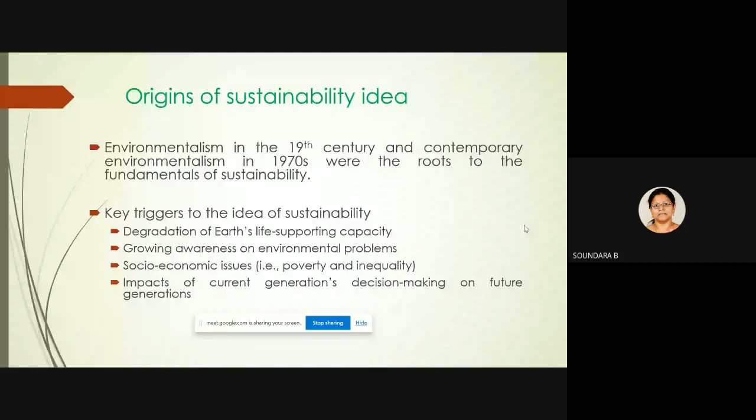The definition of sustainability given by the United Nations in the 1987 'Our Common Future' report is: development that meets the needs of the present without compromising the ability of future generations to meet their own needs. It means we have to utilize resources while also keeping resources for future generations. That is the concept of sustainability.

We also have the ASCE definition, which is a triple bottom line concept. We have to concentrate on everything lying under the umbrella of environment, economic, and society. We must take care not to degrade the quantity, quality, and availability of natural, economic, and social resources while making progress. That is the major definition given by ASCE.

There are different avenues: environment, economy, engineering, and equity, as stated by Basu et al. They have identified many conflicts in achieving sustainability among these 4 E's. This is the 4E concept. There are also 4E's, 5E's, and different avenues given by different authors, but I will not go into detail about that.

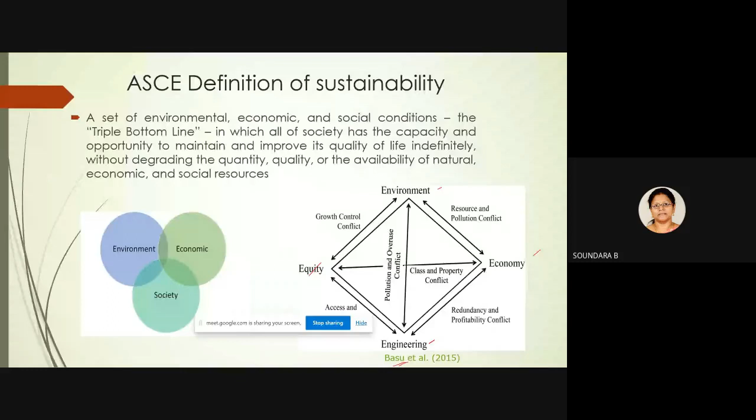As civil engineers, our responsibility includes goals like industry, innovation and infrastructure, and sustainable cities and communities—especially these two—along with clean water and sanitation. All of these come under our umbrella. We need to take these goals forward and achieve the targets set for them.

In order to make a sustainable environment, as civil and geotechnical engineers, we normally go for ground improvement techniques. As civil engineers, we have diverse and important encounters with soils. We use soil as a foundation element, laying foundations on soil so it can take the load. We depend on the soil for its bearing capacity, and we also have to monitor settlement. So first, we use soil as a bearing medium.

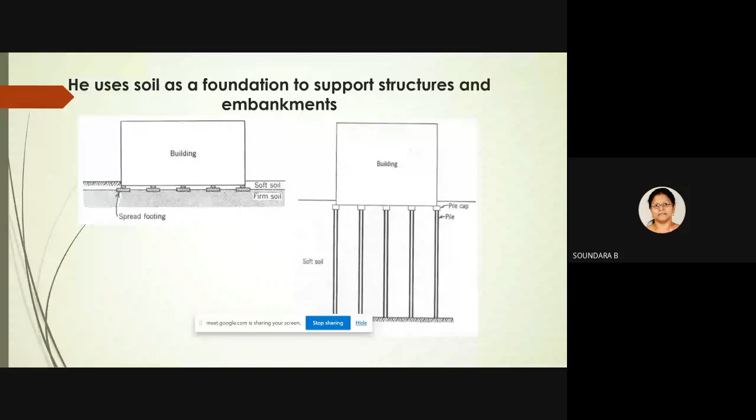We also use soil as a construction material—whether fine-grained, coarse-grained, or even gravel and boulders—and we need to rely upon its properties.

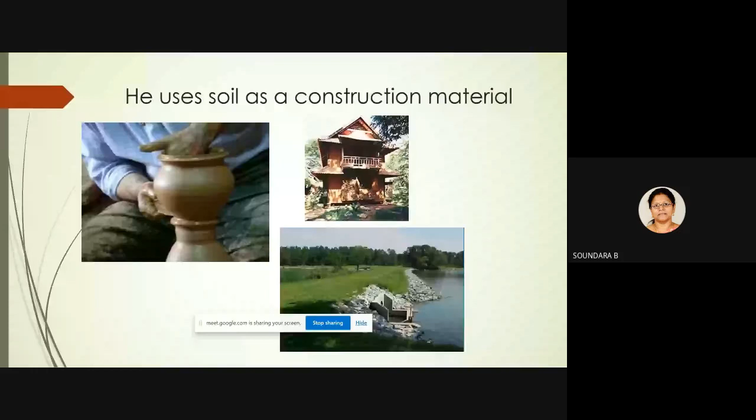We also have to take care about the lateral pressure given by soil during excavations, underground tunnelings, or openings, because soil can easily fall to its own angle of internal friction or angle of repose. So if we want to retain the soil, it will exert some pressure that we need to account for.

In day-to-day life we encounter many soils. Because of different deposition processes and weathering conditions, we may encounter soils not suitable for our purpose. From a civil engineering point of view, we have boundaries within which we need the soil to behave, but in practice the soil won't always behave the way we want. We want soil with high bearing capacity, low settlement values, and minimal fluctuation with moisture conditions—but soil in nature varies.

So I will just touch upon the problematic soils—problematic in the sense that they don't react the way we want. These are called problematic soils.

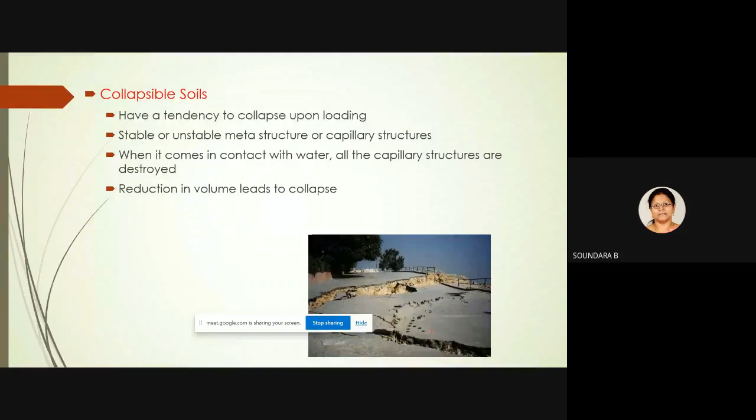Collapsible soils have a metastable, capillary structure. If water enters this structure, the capillary structure may collapse, leading to a sudden reduction in volume and sudden collapse. It is not at all recommended to found structures over this kind of soil. We can identify such soil by measuring its void ratio—the difference in void ratio between the dry state, the watering state, and its natural void ratio.

All these things we can put together and get a term called collapse potential. Depending upon its percentage, you can mention the severity of the problem. So 0 to 1 means it's okay, not problematic. But if it is more than 5, then it is a troublesome soil, and we need to do some ground improvement techniques in order to carry out construction activities over those soils.

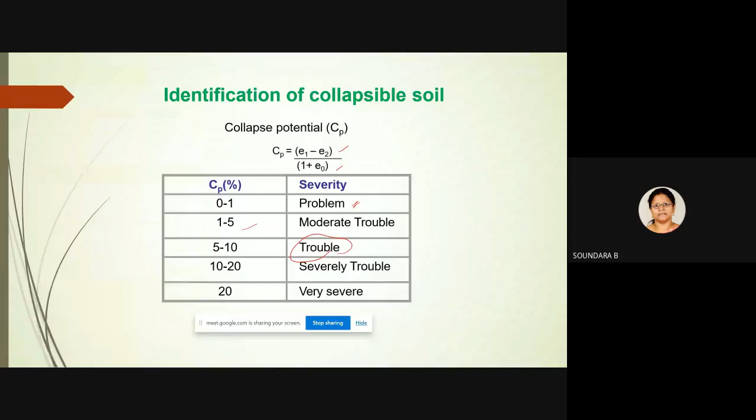This is sudden subsidence and collapse, which may occur around a few meters surrounding. So all the structures which are laid over the soil may collapse due to this sudden collapse.

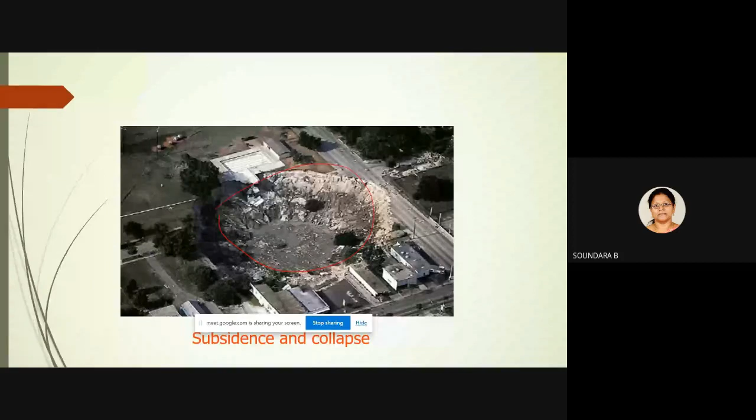The other type is liquefiable soil - it's not a type of soil, it's a condition actually. During vibration or dynamic load, especially during earthquake loads, what may happen if a sandy soil is below the ground level, and if there is a water table here, and the soil is a loose sandy deposit, then what will happen?

Immediately after a sudden vibration, the pore water pressure tends to build up - the water inside the pores we call pore water. So when a sudden vibration occurs, the pore water pressure builds up, and this sudden build-up causes the effective stress to become 0. When pore water pressure equals sigma, effective stress becomes 0. Effective stress is normally useful for getting the shear strength of the soil.

This is the shear strength of the soil by the Mohr-Coulomb equation. In effective stress condition, tau equals C dash plus sigma dash tan phi. So if sigma dash is 0, what will happen?

For cohesionless soil, C will be 0. So tau equals sigma dash tan phi, also 0, so the shear strength will become 0. Once the shear strength of the soil becomes 0, it may float - it may just lose its bearing capacity.

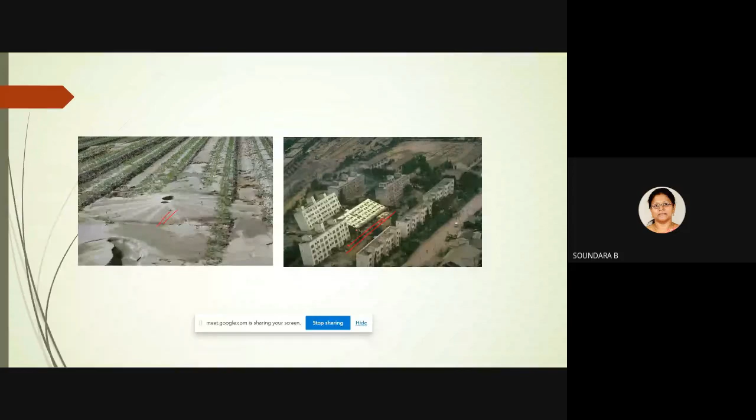Mainly sand classification is based on the relative density, and relative density has correlation with SPT N value - the standard penetration test N value. We normally do SPT tests for any soil exploration purpose, and based on those values, we can classify sand deposits.

When the SPT value is 0 to 4 or within 10, the soil behaves as a loose sand deposit. If this sand lies in earthquake prone zone areas and below the water table, there will be liquefaction. We need to treat this kind of soil, or increase its density by introducing ground improvement techniques.

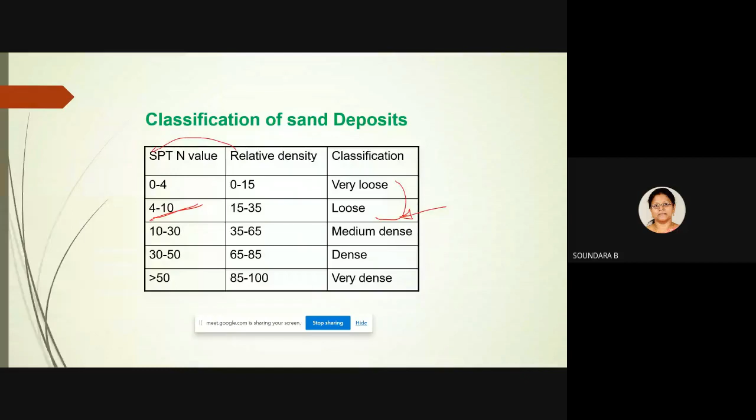Then there is contaminated soil - contaminated with biodegradable or non-biodegradable material. Usually it's very difficult to understand the behavior of this kind of soil with time. If we perform a consolidation test for soft clay, even one year later, the soft clay will give the same details about coefficient of consolidation, compression index, everything.

But if you perform a simple consolidation test for contaminated soil, it won't give the same result after a year or two, because it is already decaying due to the biodegradable material in it. So it's very difficult to predict the behavior of this kind of soil - that is one of the major problems with these soils.

Another one is expansive soils - soils which can easily swell and shrink. Swelling means increase in volume, shrinkage means decrease in volume, upon changing moisture conditions. We normally encounter different seasons, and with seasonal variations, swelling and shrinkage might occur, which reflects on the behavior of the structures.

This type of clay has a mineral called montmorillonite, which has the ability to swell upon increasing its water content. Because of that, lightly loaded structures founded over this kind of soil will be severely affected - because the uplift pressure given by the soil has to be borne by the superstructural load.

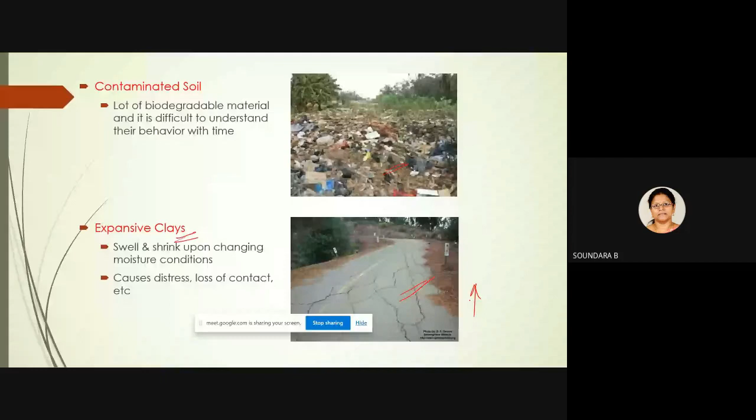But if it is a lightly loaded structure, this uplift pressure might cause uplift and differential settlements. Normally the identification pattern uses basic test parameters like liquid limit, plastic limit, and shrinkage limit, from which we get the plasticity index and shrinkage limit, very important parameters for expansive soil. With this range we have the swelling potential classified as very high swelling potential soil, when the plasticity index is greater than 35 and shrinkage limit less than 10 or so.

Again, this is a lightly loaded structure. This picture has been taken in Chennai, near the Anna Nagar area. Most of the buildings in the 1980s collapsed due to this kind of expansive soil in Anna Nagar area, especially the G+1 buildings.

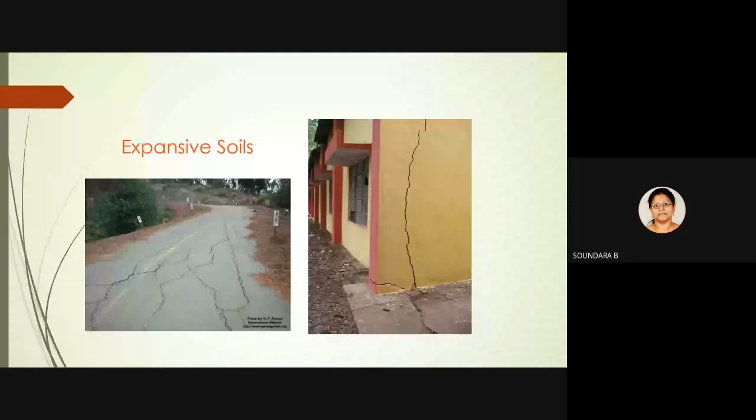Then another type of soil is normal soft clay soil deposits. We all know that soft clays possess very low bearing capacity and have a capacity for very high settlement. Both of these aspects are not wanted by geotechnical engineers, so it comes under problematic soil. We usually identify clay deposits using the undrained shear strength.

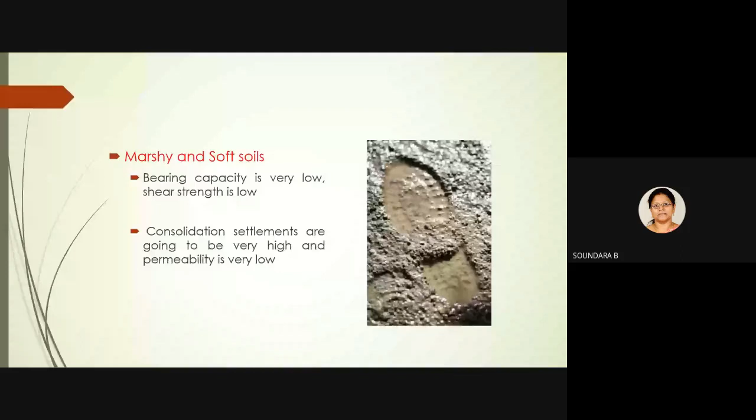For the soft clay deposits, we can perform the vane shear test, and for somewhat firm to stiff clays, we can go for UCC or other shear testing methods. Based on the undrained shear strength value, we can classify the consistency of the clays as soft to very soft, so we need to do some ground improvement for this kind of soil.

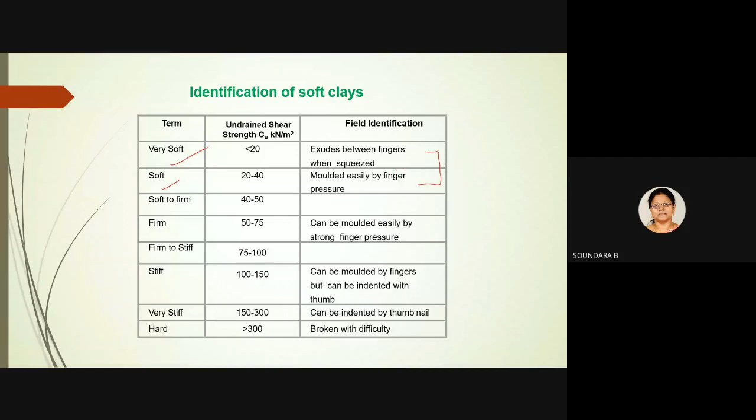By introducing some ground improvement techniques. Another type of soil is called sensitive soil. If they are in the undisturbed state, they can hold this much load, but if you just disturb its structure by remolding, it may flow as a liquid. This is because of the cardhouse structure of these sensitive soils. Normally sensitive soils appear to be very strong, but a slight disturbance makes them weaker.

It is a leda clay, usually found in Canada. This sensitivity value can normally be calculated using the vane shear test. Sensitivity is calculated as, without any disturbance, what is the undrained shear strength, and with remolding, what is the undrained shear strength. If you take the ratio of it, that is called sensitivity.

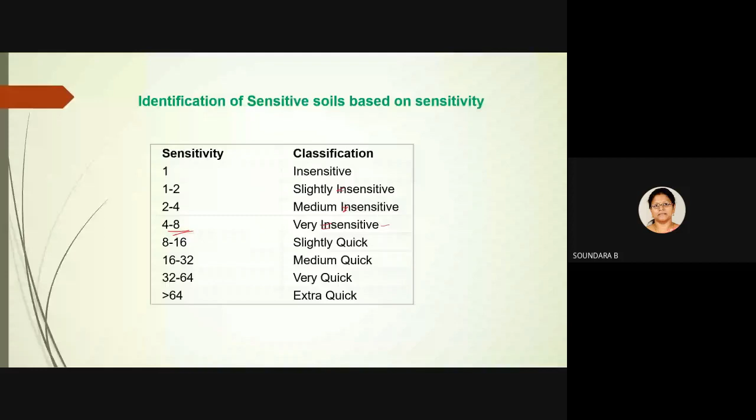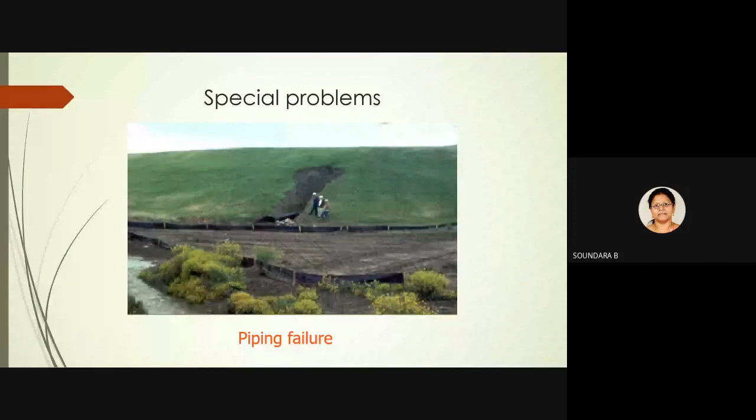There are some special problems like piping failure because of sudden rainfall conditions, which may cause piping failure. This is a recent landslide in Munnar.

So there are so many reasons why we need to go for ground improvement techniques before construction activities. The ground improvement techniques also need to be optimized. How can we optimize the entire solution regarding the ground? The first thing is we should have very good data about the soil, what kind of soil deposit is there.

That can be obtained only by doing extensive soil investigation. We may require around 2% of the entire project cost for extensive soil investigation, but in most situations we neglect this kind of soil investigation. That should be avoided. We must have very good soil data, then only we can think about the improvement methods to be adapted for the soil.

And physics, what kind of force is acting. If it is a cohesive soil, cohesive force will be there; cohesionless soil, friction will be there. So what is the physics which controls the entire mechanism in the soil? That we need to assess. Then materials, that part I will go into detail in this presentation.

The materials used for construction or any treatment methods should be cost effective, and the carbon footprint of the material should be low, ideally a waste material. If you reuse it, that gives further optimization to the problem. We also need to consider time, how long it takes to process the whole thing, and convenience, whether the solution is flexible enough to allow changes in between. These are the approaches we need to consider before getting a suitable technique, like ground improvement techniques, for optimization of the geotechnical project.

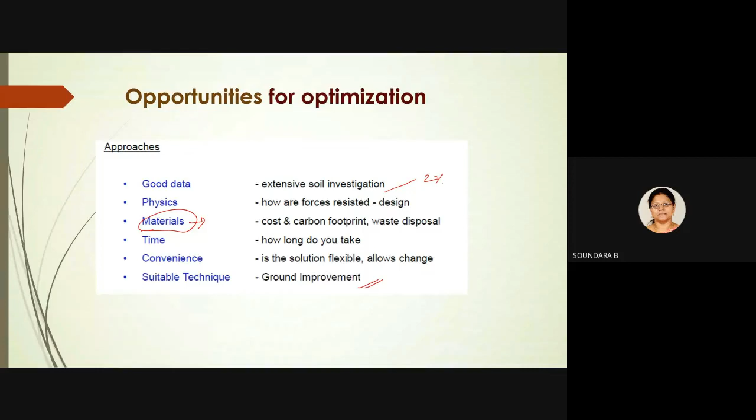If you go for any ground improvement techniques, we can classify them into ground improvement, ground treatment, and ground reinforcement. There is a slight variation in these terminologies. Ground improvement means the ground stays the same, we don't include any material into it, but we improve the ground by means of densification techniques, or we use hydraulic techniques to reduce the water table or reduce the pore water pressure in it.

So if you improve the condition of the ground by mechanical means, that is normally called ground improvement. Ground treatment means we need to treat the ground by giving some dosages. Similarly to how a doctor gives medicines to treat us, for soil also we need to give additional material to treat its behavior, whatever is needed. By introducing cement or admixtures like lime or fly ash, we treat the soil in the way we want.

Reinforcement also performs like a treatment, but it will not react with the soil. Instead, it induces additional friction to the soil, so that the reinforcement provides additional benefit in shear strength. These are different mechanisms, but the aim of the entire thing is to make the soil behave the way we want.

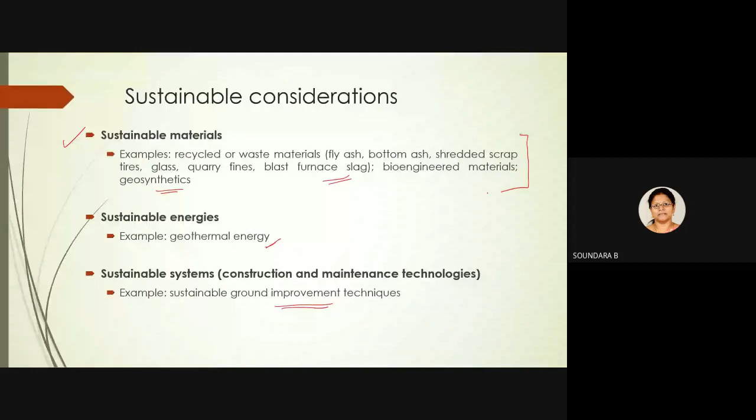And the sustainable system - normally whatever systems we have as ground improvement techniques all come under the sustainable system. So most of my lecture today will focus on sustainable materials. I'll give a glance at some of the research works and case studies available in this area.

The first thing is geosynthetics. Geosynthetics nowadays have been used in each and every project somehow. In most projects we are using this kind of geosynthetic material. Most geosynthetics are made up of HDPE, high density polyethylene material. There are different varieties: geotextiles, geogrids, geocells, geomembranes, and this is actually XiTRACK. It depends on the purpose where we are using it, and based on the purpose, different varieties of geosynthetic materials are coming up nowadays.

We also depend upon geosynthetics very much nowadays. These are the major functions of geosynthetics: one is the separation function, especially in road pavements, to separate the soft subgrade and subbase material - that's the separation function. Filtration, especially for water filtration, and reinforcement - this is a major function we expect. Normally we use geogrid and geotextile as reinforcement material, and also for slope protection. For all these things we use geosynthetic materials.

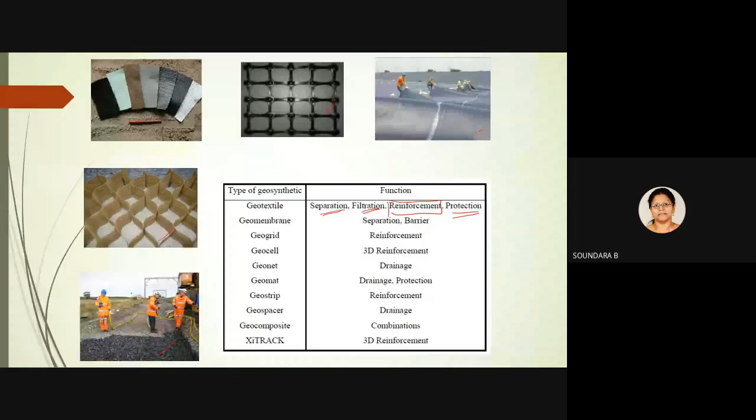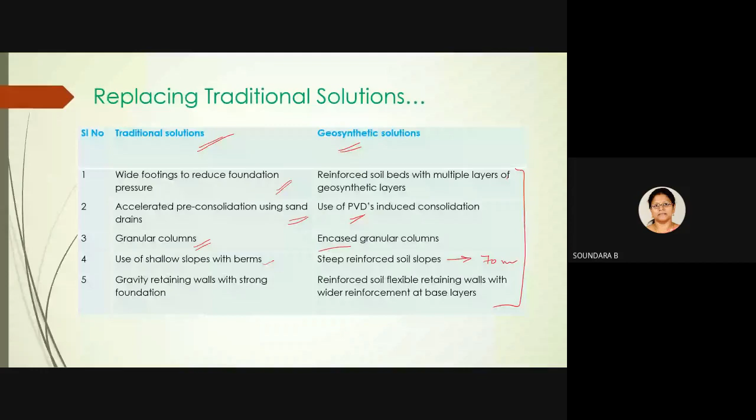If you talk about fill materials, for earthen fill materials needed for any embankment purpose or fill material embankment for any railway, that fill material can be of industrial waste material. These are the materials which we have focused on for geocell fill. Geocell, as I have shown you, is a three-dimensional structure, so within this we need to fill some portion of soil or any fill material in order to increase its performance. That can be given by means of this kind of industrial waste.

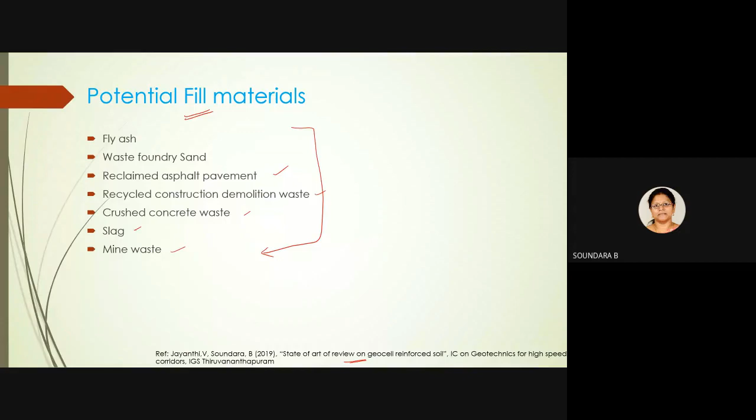There is a review paper done by us which states the possible fill materials that can be taken from industrial waste, like fly ash, waste foundry sand, RAP material, reclaimed asphalt pavement, recycled construction and demolition waste, crushed concrete waste, slag from steel industries, and mine waste. All this waste can be used as an effective fill material, not only for the geocell but for any case where we need to fill the soil, or for any embankment purpose.

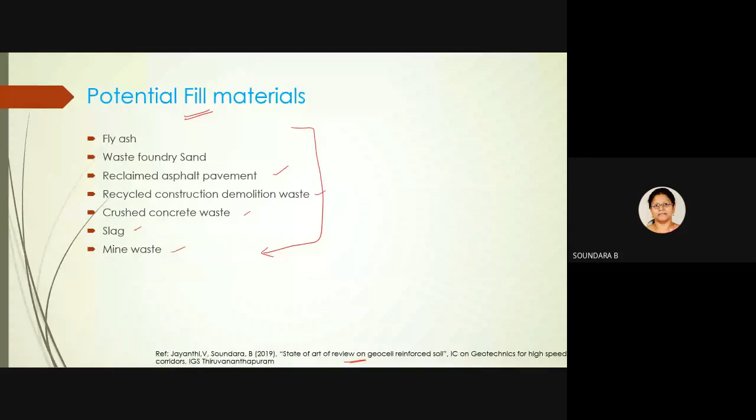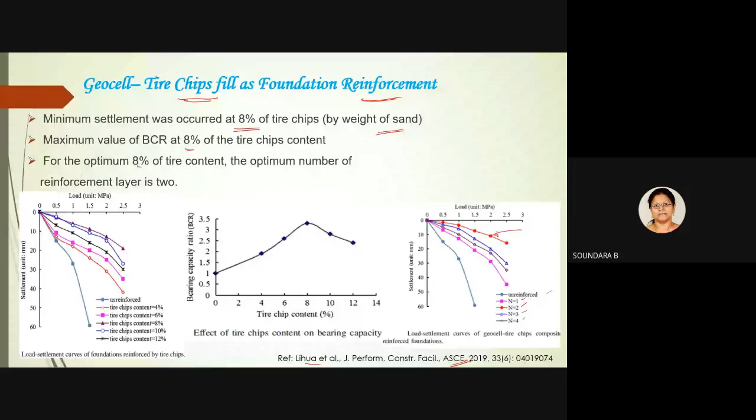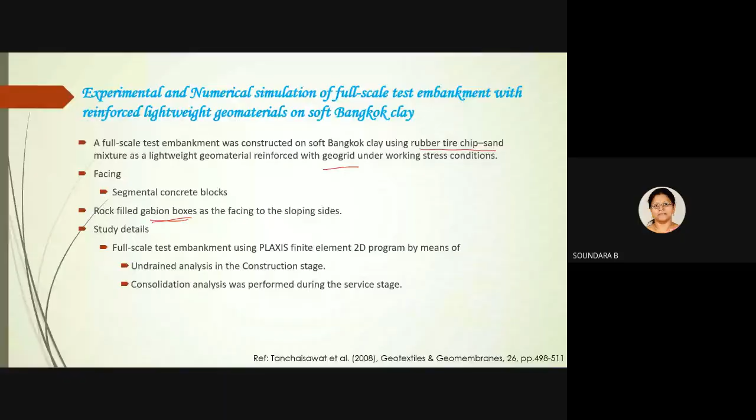This is the full-scale embankment we have made. It has been well instrumented with earth pressure cells, inclinometers, for getting different settlement profiles, subsurface settlement plates, piezometers to study pore water pressure distribution, and strain gauges and extensometers.

All these are well instrumented, and they observed the settlement pattern and pore water pressure development by constructing this kind of full scale embankment. They also analyzed it in Plaxis, for the undrained case.

These are the observations they have made. The computed lateral wall movement over-predicted the measurements. This may be due to negligence of drainage conditions in the Plaxis 2D software. So they have not modeled properly the drainage conditions, and that may be the reason for the over prediction of lateral wall movements.

And the simulated geogrid movements under-predicted the observed field data. There are some deviations between the predicted and observed field results and the Plaxis report.

Anyway, they have made some comparison and given their solutions on how we can improve the modeling part. In our cases, as private engineering colleges or lower level research institutions, we cannot perform a full scale embankment modeling. So if you have a well defined Plaxis, or any finite element model, not only Plaxis, which can perform better or correlate well with the case of a full scale embankment or whatever large scale model it reflects, that will give better research findings for us. So we need to have much more focus on this kind of research.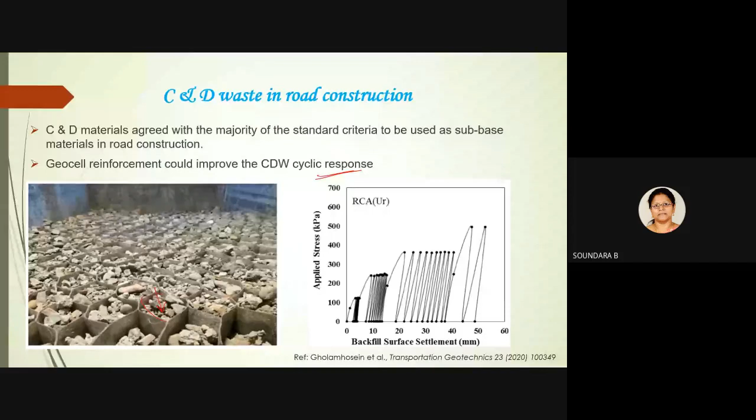And Castorina Silva Vieira, they have valorized the fine-grained C&D waste. Normally we concentrate on coarse-grained C&D waste, but they have adapted also the fine-grained C&D waste in reinforced soil structures, and they have applied that solution for RSS.

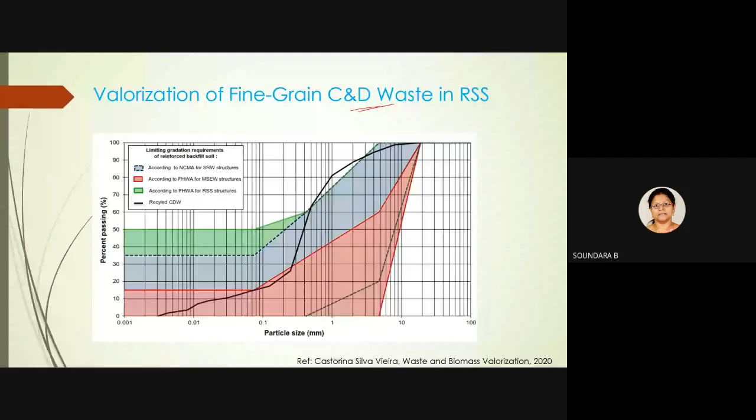Again, they have made a real model for this kind of embankment with geogrid material as reinforcement and C&D waste as fill material. They monitored it for about one year, and examined the geosynthetic specimens, and found that there is no damage to the geosynthetics, and it is performing well even after a year.

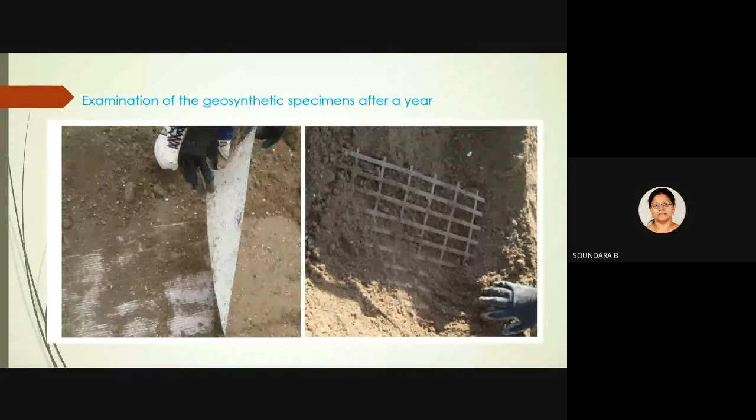The major findings: they performed laboratory leaching tests, especially for C&D recycled material. Leaching could be a problem, but based on the laboratory leaching test, they found that C&D materials can be classified as an inert material. So we can use this material as a fill material for geocell or any fillings. C&D recycled material exhibits suitable shear strength and can be used in construction of geosynthetic reinforced structures.

They have adapted 2 geogrids and observed the performance after 12 months, and did not find any damage to the geogrid or any degradation.

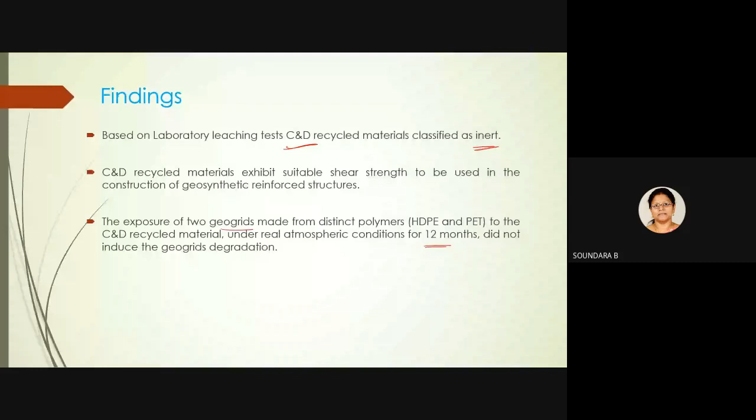This study was done in one of the Indian laboratories, I think at an IIT. It uses geocell reinforced coal mine overburden waste, which they used as a subballast in railway tracks on weak subgrade. They found that we can use this kind of waste material to improve the performance of the subballast layer.

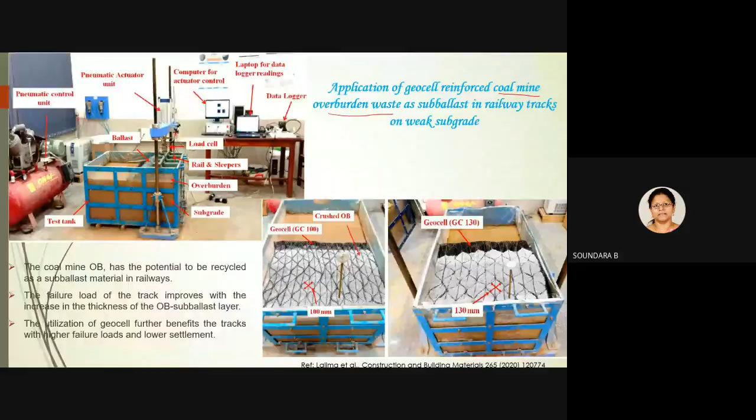This is another field test, I think performed in some foreign countries, with reference taken from ASCE. They monitored the geocell reinforced RAP base, where RAP is reclaimed asphalt pavement. After its lifetime, asphalt pavement is normally removed and a fresh layer applied, but we can utilize this already reclaimed asphalt pavement as a base material for flexible pavements.

They made this study even in expansive soils, and found that 100% RAP replacement is not feasible, but we can use maybe 50% RAP for the base layer. They noted that using 100% RAP in the base layer is not significant on its own, but if we use geocell reinforcement, then we can utilize 100% RAP. That is the finding given by them.

They also monitored with different instruments, earth pressure cells, settlement gauges, and all these things, monitoring the subgrade and the geotextile layer, and found that it performs very well under geocell reinforcement with 100% RAP. They monitored this for about one year.

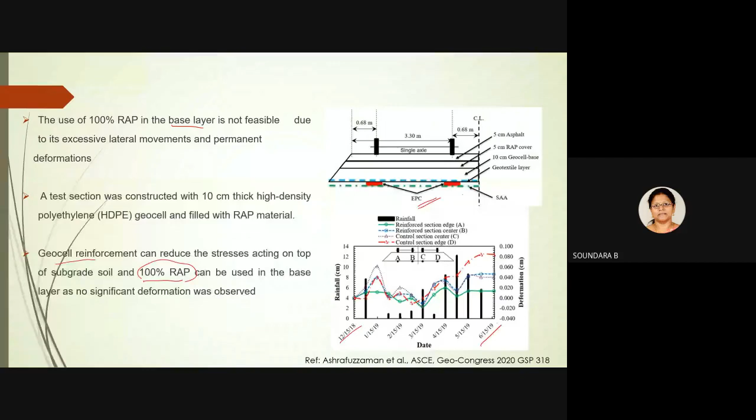This is one of the studies, I think from IIT. They have used fly ash as a bed material and utilized geocell as reinforcement. I am talking about geocell because I have made a review on it, looking at what different waste materials have been used for geocell fill. One of my PhD scholars is doing work on geocell fill material, especially industrial waste material, so it is a kind of research we can do. Before that, we need to analyze all the studies available in that area, so I've made these reviews and I'm presenting these papers so you can get an idea of the research happening in premier institutes like IITs and other foreign universities.

Here they have adapted a fly ash bed and geocell mattress with a basal geogrid and jute geotextile separator. They made a footing by modeling a loading plate as a footing and monitored the settlement; the load-settlement behavior is given here. They found there was no surface deformation during footing settlement in the reinforced fly ash beds, which was one of the better observations they got.

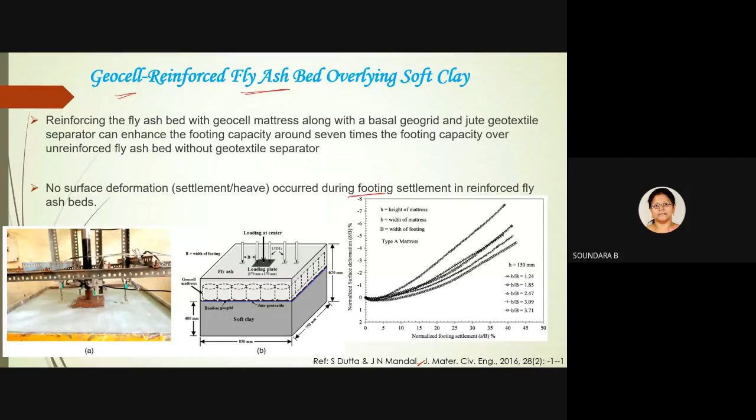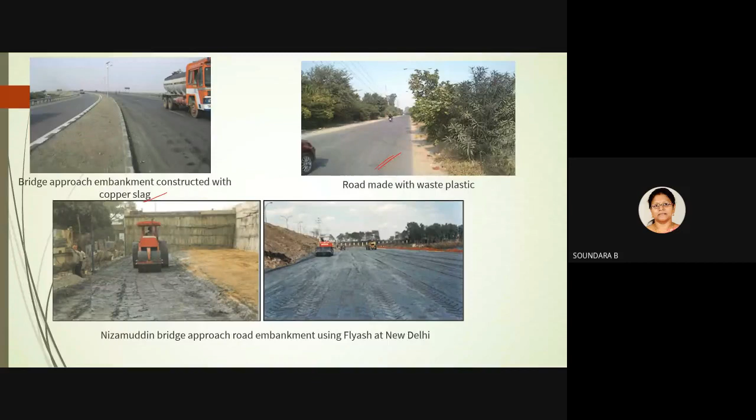I want to mention one more material called CLSM - controlled low strength material, made up of different industrial waste. This is a project, I think in the USA, where they adapted design and installation of a long pipeline, about 225 kilometers, which carries water from different regions and distributes it to others. I don't know all the names, but it's a very long pipeline.

For that pipeline, we need to make the haunch or bedding material, which they thought to backfill using some CLSM material. They need to excavate a portion of soil to install this pipe, and then backfill it. So they thought, why not use this excavated material as one of the ingredients for CLSM and make it a bedding material. They checked this and used the native soil as a CLSM material.

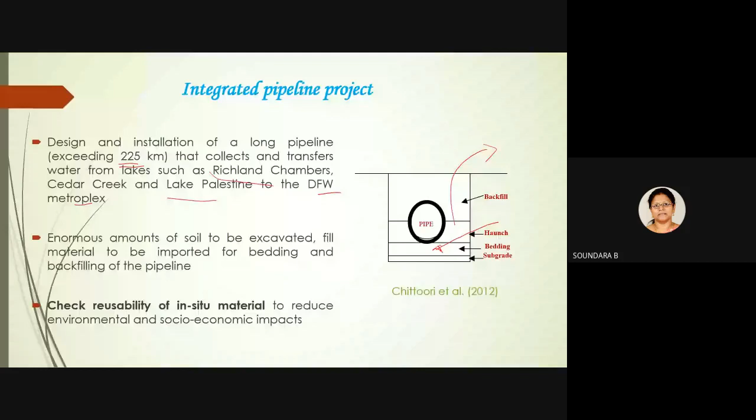CLSM normally has these properties: it should be flowable, self-leveling, and solidifies. It may not perform as well as concrete, but for pipeline bedding we just need a stiff material - that's enough, so they can utilize CLSM.

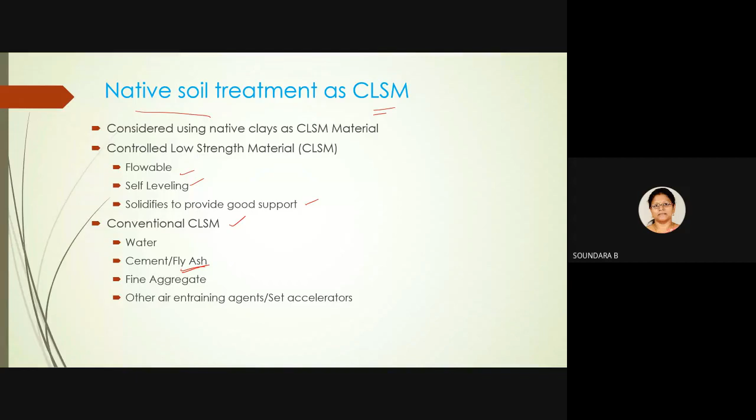Conventional CLSM has fine aggregate, a cementing agent, and maybe fly ash or other industrial waste material. But here, they utilized 10% cement and most of the excavated material for the fine aggregate. They combined all these things to make the CLSM, trying combinations of soil type which reduced the required water content by 20% and setting time by 2 hours. These were the limits given, and within that they made trials in the laboratory and found a better proportion to use for CLSM.

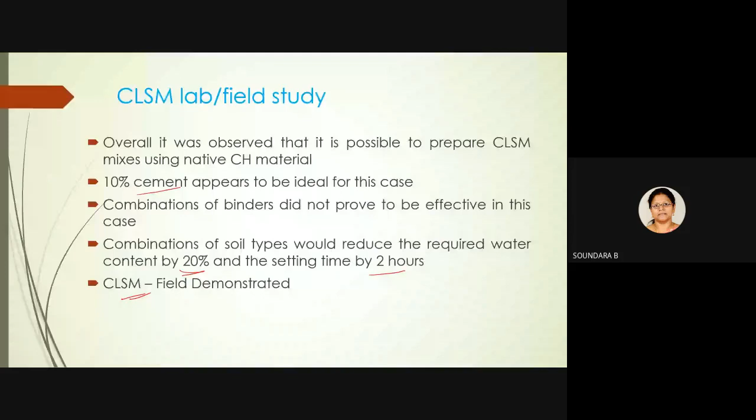This is a field-demonstrated case, and they obtained sustainability considerations in this project. What are the major impacts of using this CLSM material with in-situ material? There's a social impact from reusing excavated material, and less damage to city pavement due to less transportation - there's no transportation from any industry since they utilize the excavated material for their purpose.

There's also economic impact: cost saving from reusing native material, limited landfilling cost, and limited transportation cost. And environmental impact: since we're reducing transportation, there's low carbon emission and less landfilling because the excavated soil can be reused. So all the triple bottom line I mentioned earlier - social, economic, and environmental - all lie in this project.

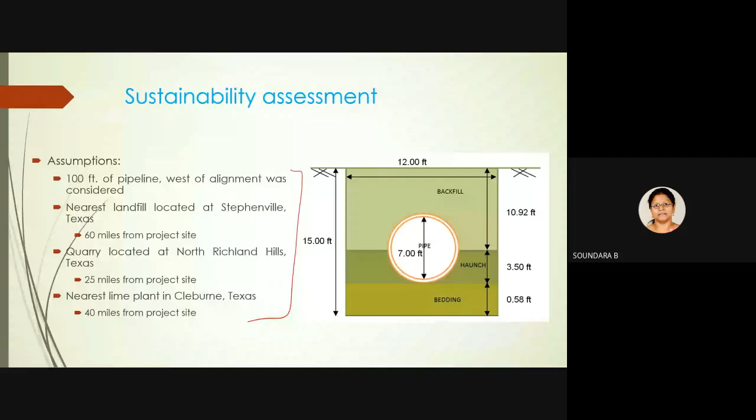So they have made 3 different calculations: one using native material without any treatment as bedding and embedment, using imported material as bedding and embedment, and using native material with treatment with some other additive materials. So they found there is a reduction in CO2 emission in both of these cases.

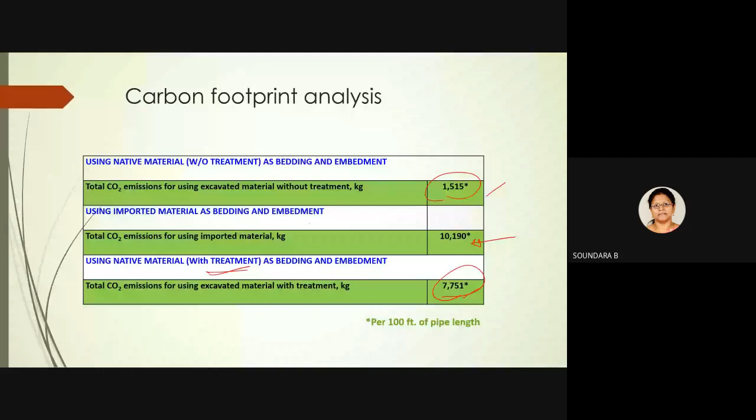Rather than importing the material, we can utilize the available material for our purpose. And also the cost analysis, again for the 3 cases, they found both of them will reduce the cost much rather than importing any material from outside.

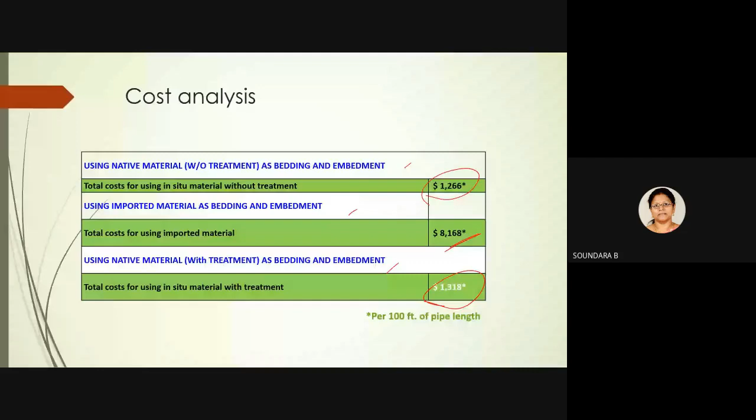So this is one of the field case studies which reflect the sustainability of the project. The lessons majorly learned from this case study: there is considerable potential for reuse of the local native material. Even though the local native material is classified as CH, that is clay of high compressibility, they have utilized this native material as CLSM, and there is a major reduction in carbon emission.

There are several millions of dollars of cost savings. So for each and every project, we should look upon any point which can give this much benefit to the project. That is nothing but the sustainable aspect of the project.

Next one is my own project: the expanded polystyrene, which is normally called thermocol. It is lightweight, durable, and moisture resistant can be given. These are some of the properties of expanded polystyrene.

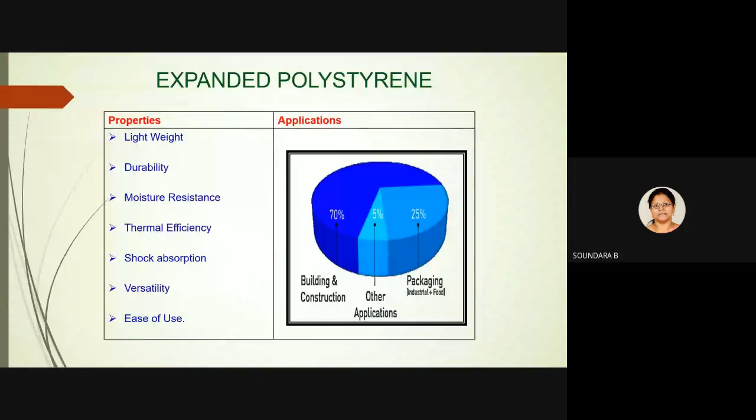So why am I talking about EPS here? I have used the EPS, and earlier studies reported that compressible inclusions can be given to geotechnical applications in order to reduce the pressure given by the soil. This was adapted in 1997 itself by Horvath, who used the compressible inclusion in a retaining wall.

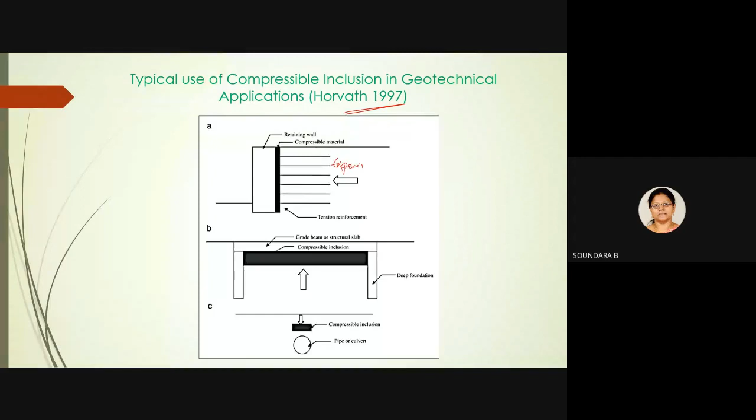This is an expansive soil. So in order to take up this expansiveness, they have included this compressible material so that it can perform as a compression material, so that it can take up the heave and also the pressure which is exerted by this expansive soil.

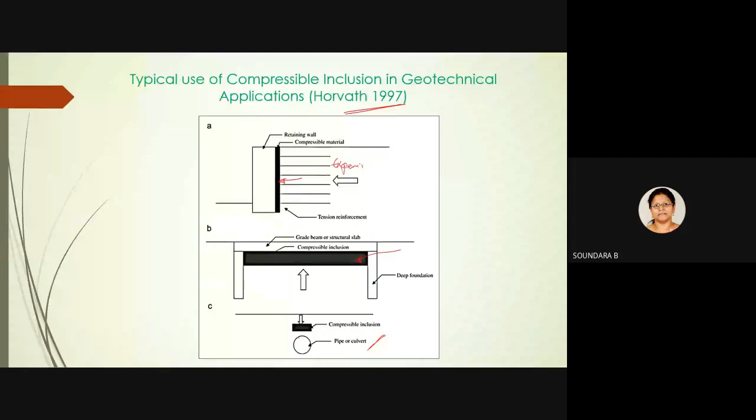So that is one of the purposes here. And here also, this compressible inclusion can act as a cushioning material, and even above the pipe material, like a haunch material, we can utilize the compressible inclusions. So this I have applied for expansive soil.

This is the project which I got from SERB under early career research. What we have proposed - this is a pure laboratory study.

So for the expansive soil, one of the treatment methods is lime columns. We can treat the soil by introducing lime as a column for some deep strata treatment. But if you use lime as a material, the first thing is the cost, and the second one is environmental degradation. In some cases, the lime may increase the pH, so it may lead to poor environmental problems.

So in order to address those problems, the EPS waste material can be used. The waste EPS geofoam can be utilized in place of lime or cement or fly ash, whatever we use for a column for improvising the expansive soil, replacing that with waste material and giving some inclusion to the expansive soil to take up the swelling. That is the main aim of this project.

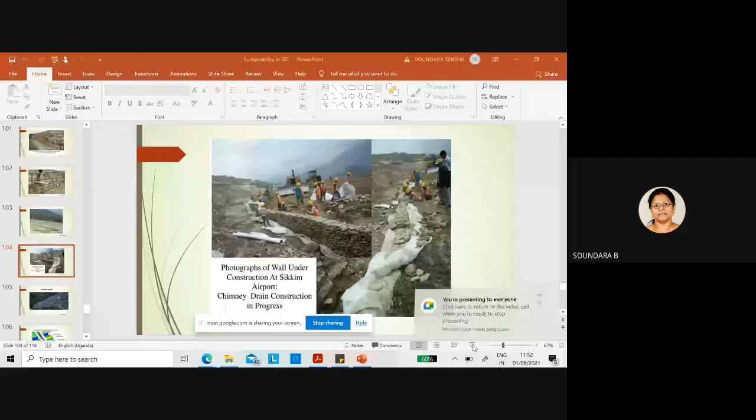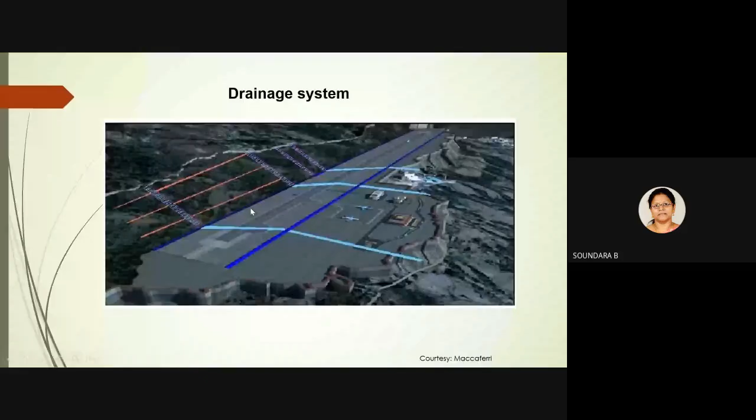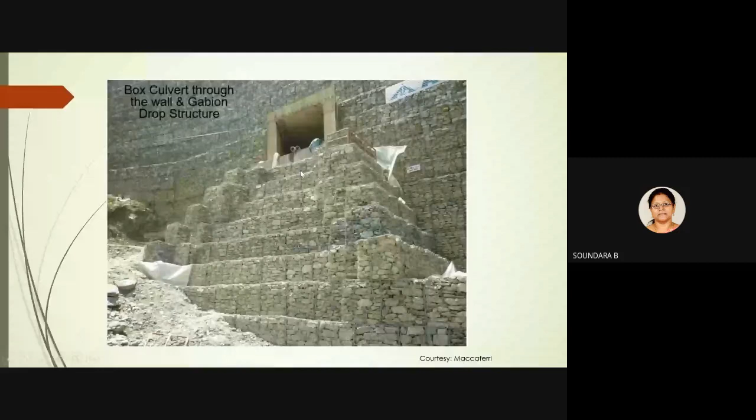I was just talking about the construction of the airport at Sikkim. They utilized their research team to get an idea about the sustainable considerations for making this airport. They designed up to 70 to 80 meter height MSE wall and drainage aspects also. I have shown here the chimney drain construction in progress for drainage purposes, and these are the pipes which can collect the drained water from here to here. We need to follow a complete drainage system for effective functioning of this RS wall, so there is a different drainage capturing system. This is one of the beautiful ideas they got - if the water flows here, it is...

So they have adapted a combined reinforcement system like Terramesh and Paraweb - it's a kind of combined solution so that they can adapt it and get a cost benefit out of it. They have also utilized the excavated material for filling, which is also one of the sustainable solutions.

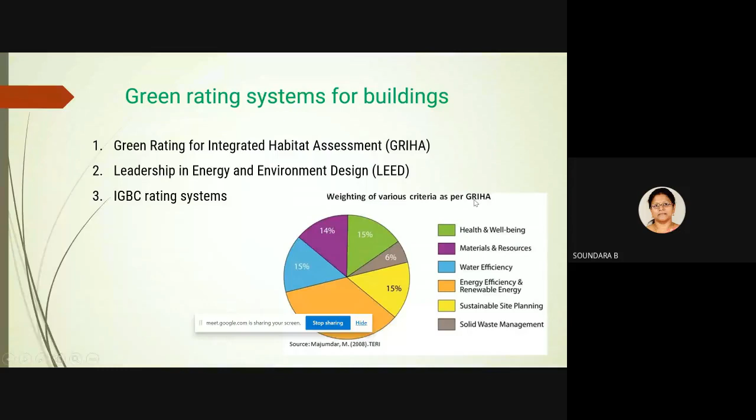So I was talking about the summary, and for everything we need some reward, right? So there are some green rating systems, even for buildings and structures. These are the different green rating systems we follow in India - Griha, LEED, and IGBC are the three different rating systems followed in India. LEED is US based, and there are different categories like sustainability of the site, water efficiency, energy and atmosphere, and materials - so we can include recycled and reusable materials for our use, indoor air quality, environmental quality, and innovation and design process.

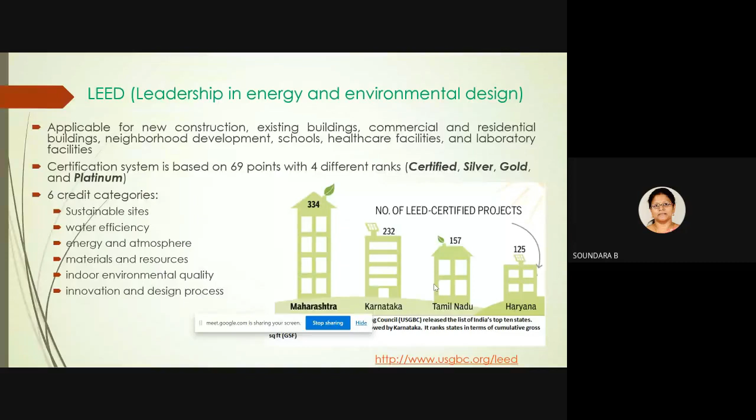So far, this is data from 2019. So far in Maharashtra, 334 LEED certified projects were there, and Tamil Nadu is in third place. Anyway, we need to boost this up in order to develop sustainability in our day-to-day buildings or other activities.

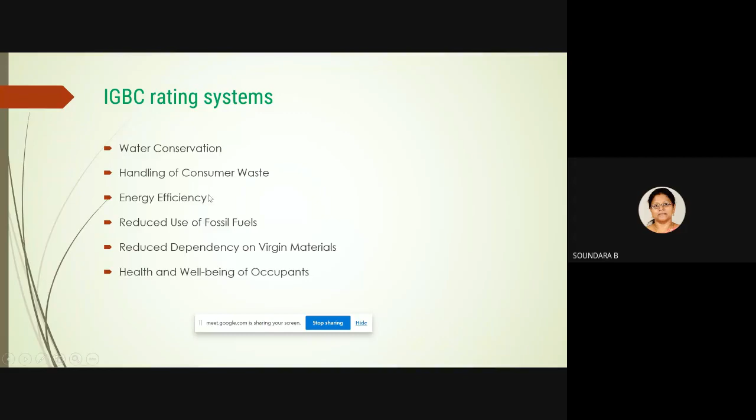So this is the final closing comment. In every aspect of our day-to-day life, we need to introduce the sustainability aspect. So as a geotechnical engineer or civil engineer, we are challenged to do the right project, incorporating some sustainability aspect. So sustainability assessment tools can be used to assess or optimize sustainability in geotechnical engineering. These examples and case studies demonstrate how sustainability can be incorporated in geotechnical designs. So I think I can stop here.

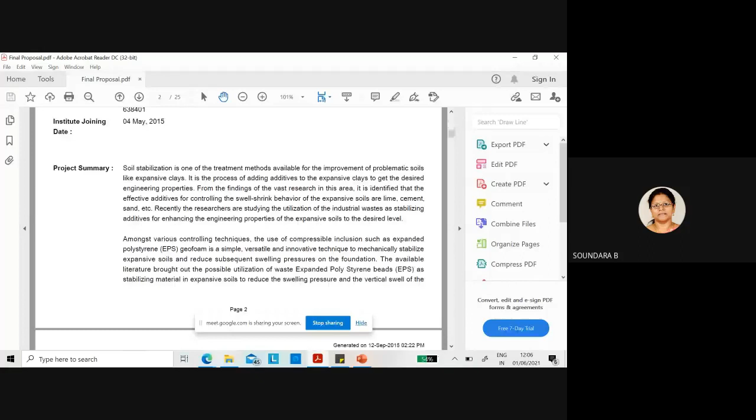And these are the details of mine, especially the project summary. They will look upon this project summary, so we have to specifically tell why we need to do this project, so that research gap should be identified and should be mentioned.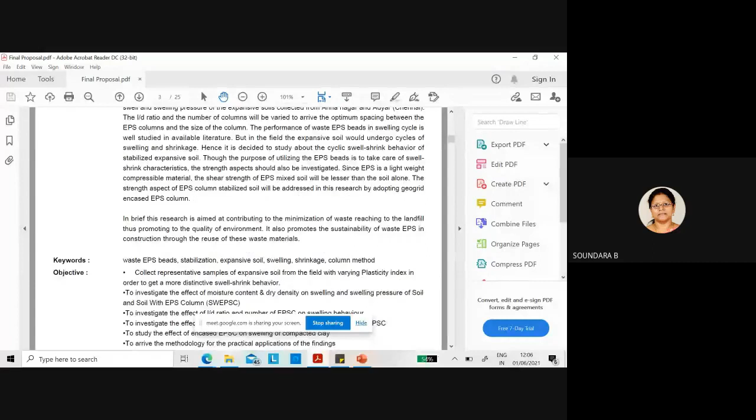And there are keywords and objectives. Objectives, of course, should be in bullet form, around 5 to 6 objectives. So why we need this, what the aim could be split up into objectives. And expected output - they have asked for expected output and outcome.

So both of the things are mostly the same, but output means what is the output from the research. Outcome means with that output, what we can do for the society or how we can implement that one. So that is the outcome.

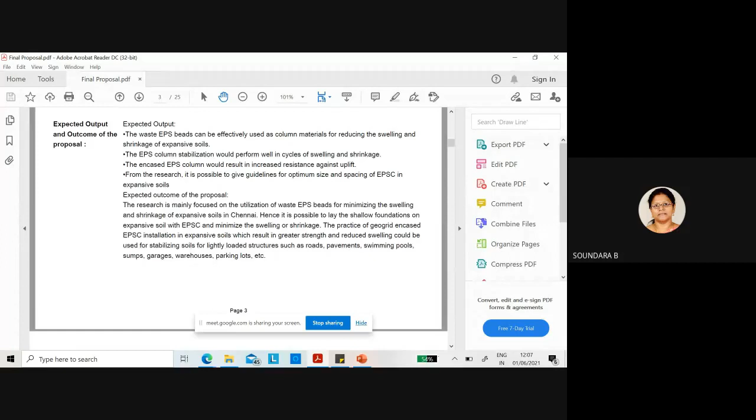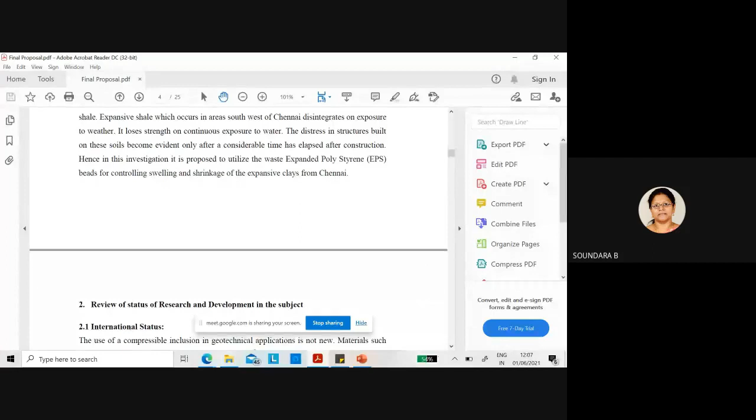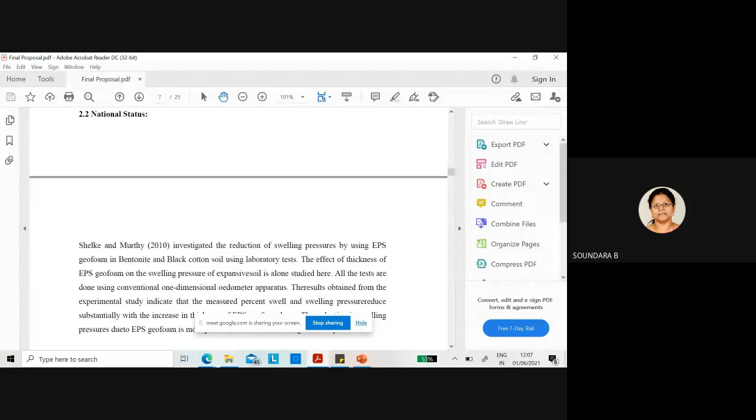So that is purely literature study, how it has been followed. Each and everything you need to specify. We should not miss any major literature pertaining to this study. So for that we have to study a lot.

And importance in the current status - so what is the research gap that you need to specify. If the project is location specific, I have given Anna Nagar, Chennai, as the area. So why we have chosen that area as our project-specific location, that we need to justify.

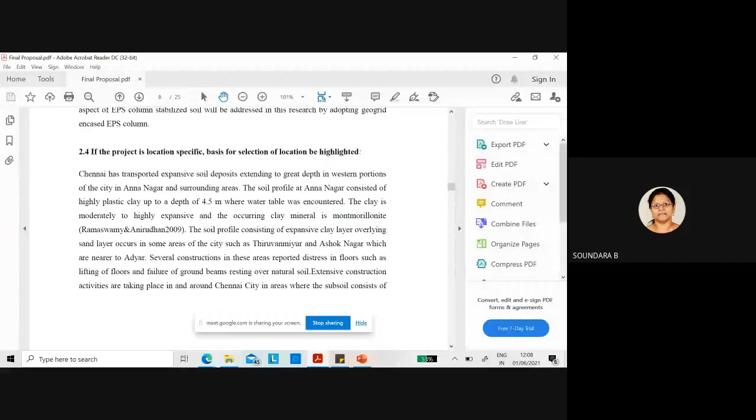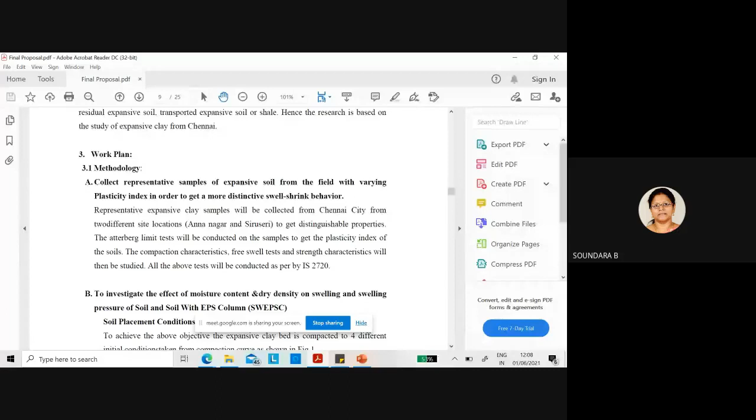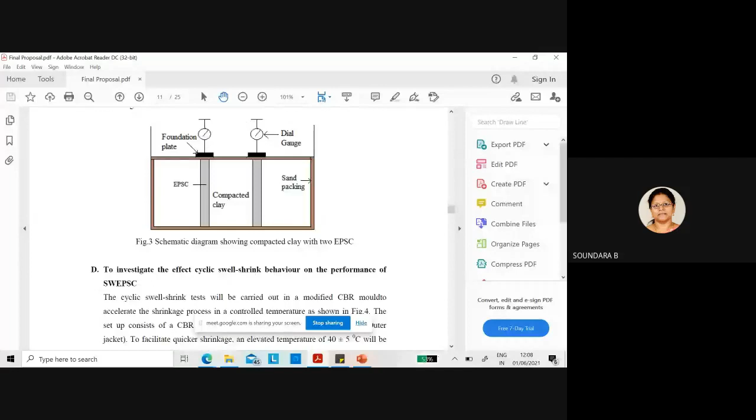And work plan, that is the methodology - how we can do this, whether it is laboratory work or even numerical work, we have to specify very clearly by giving some pictures or supporting documents. If some experiments were previously done by you, that also you can include.

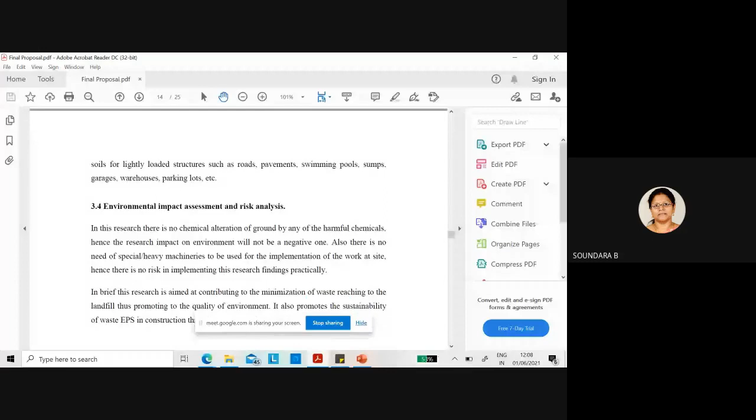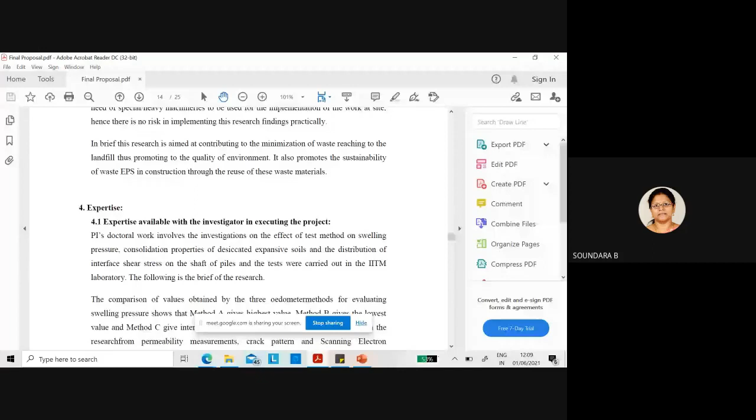And environmental impact assessment - mostly if we are using industrial waste, the environmental impact will be a positive impact, so that we can stress here. And the other things - the expertise of the PI, publications and reference.

And finally, the budget - you have to specify very clearly. For each and every item we need to specify, especially for an early career research award, we cannot go beyond or quote more for the equipment. So I have just quoted around 4,70,000 for making that modified consolidation apparatus and some other shrinkage apparatus. So the equipment cost is lesser.

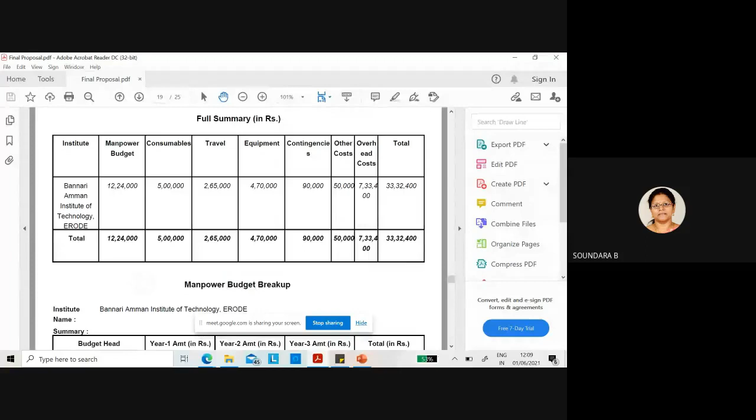Major cost I have used for manpower, and I have produced one PhD from this. Similarly, you can try by reading so many literature sources and try out a proposal which is more relevant to the current status. So I just wanted to share this with you.

It's one of the very preliminary works that I have done. I'm still trying with a different proposal, but yet to get some funding. So it's a trial process only. If we have anything to discuss, we can discuss.